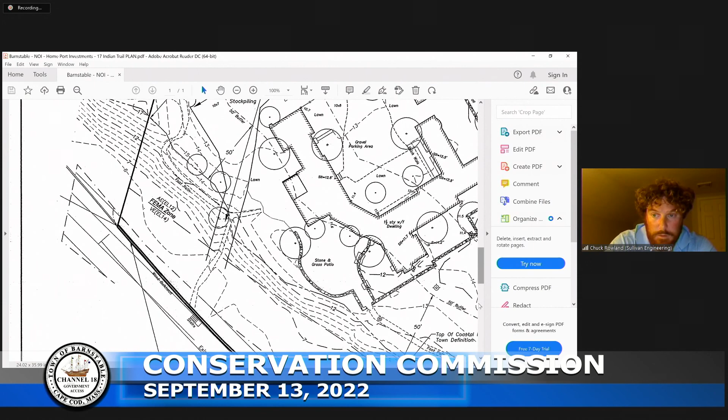Come on, quick, it's coming. I got to go slow, huh? Yep.

I think you get the idea here. We have the existing timber wall being replaced with vinyl, and we're putting in a tieback wale in the same location. With that, I'm happy to take any questions.

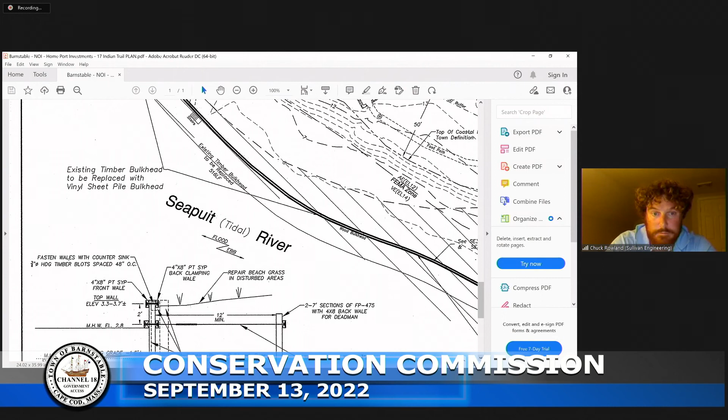We received the DMF comment letter, which had two considerations. First, appropriate erosion control measures should be employed to minimize runoff from the property into the resource area during construction. Second, after construction and prior to vegetation planting, DMF recommends nourishing the area behind the bulkhead to fill in eroded and displaced sediment. Fill should be consistent with the DMF and Massachusetts DEP's beach nourishment guide, and fill material should be of appropriate slope to avoid premature loss.

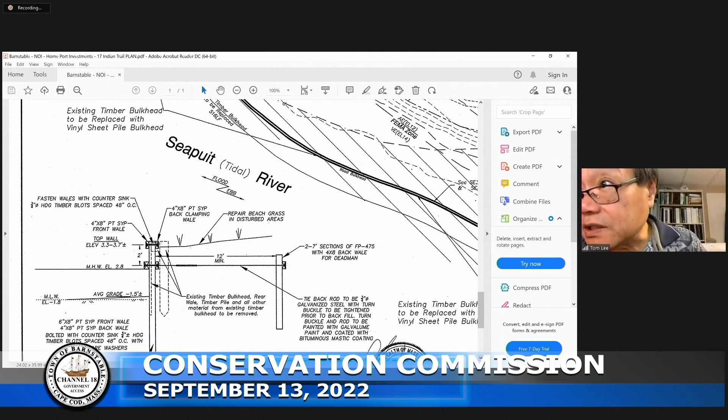Question from the commissioner. Let's see who has his hand up. Larry. Thank you. Hi, Chuck.

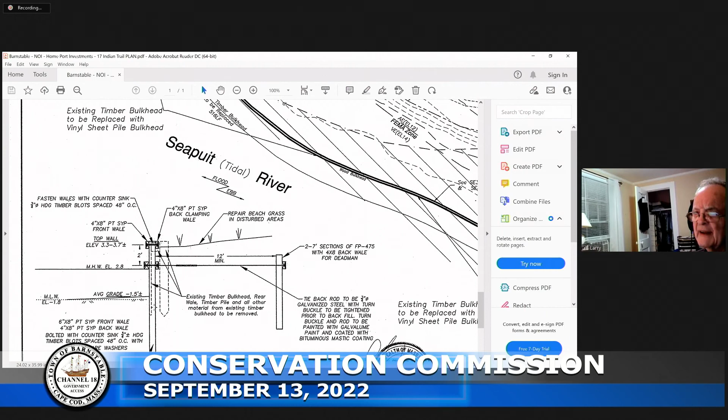I'm looking at what's on the screen, and it shows a drawing showing it looks like the sheathing is on the left-hand side, but what I'm interested in is how deep does this bulkhead go in its present condition? I presume it's wood all the way down, and how deep is the new sheathing going to go? I presume it's going to be pounded in by some sort of machine. Could you clarify those two things so we know the potential area that's going to be affected by this process?

Sure. So what you see there today is going to be the same height. We're not asking to change the height at all post-construction. The grade fluctuates, but it's about negative 1.5, and then we go to the top of the wall, so we're going to follow the grade a little bit. I gave the contractor a chance to adjust how he moves along, so 3.3 to 3.7 — it's a small variable.

So let's say a 5-foot face wall, and for construction stability and long-term rigidity of the wall, we've asked for 14-foot long sections, so they're going to penetrate the ground pretty far. But 2 down and 1 up is kind of the standard textbook ratio for things like that.

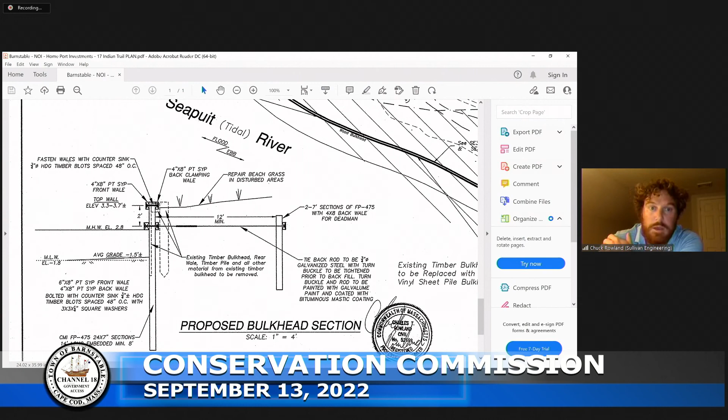So the way I pictured it was some minor digging right here so that it didn't slosh in. Dig out a handful of sections, install a handful of sections, and then move on to the next. When you're far enough away and the ground is stable enough, you backfill behind the wall — that's kind of how I've proposed it.

Okay, well, that makes sense. I'm sure some of the other commissioners, especially George, may have some questions, but I thank you for that information.

John? I wish we had a dock guy on the commission with us.

George, looking at this, can they just remove the wood, which looks like about 4 feet into the ground, and use that same hole to bury the new wall 8 feet down? Is that standard construction, George? Yes, this is very standard construction.

What happens is they'll go in and excavate behind the existing wall so that when they pull the existing wall out, none of that fill falls into the water column. They'll pull it out in sections, probably 16 to 20 feet at a time, pull the existing wood out, drive the new vinyl in place, put the dead men in place, put the tie back in place, and backfill that section before moving to the next. It's a really standard construction protocol.

They've got it down to a science now. So I'm glad Gilmore's on the commission. Thanks, George, that's all I wanted to say. It's just a really standard procedure. I don't think it's anything we have to be worried about.

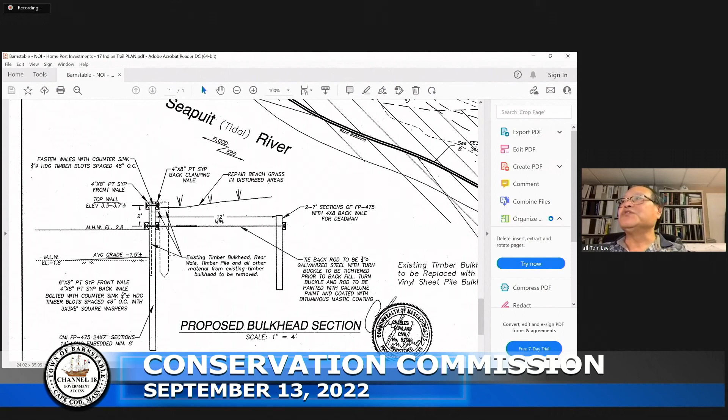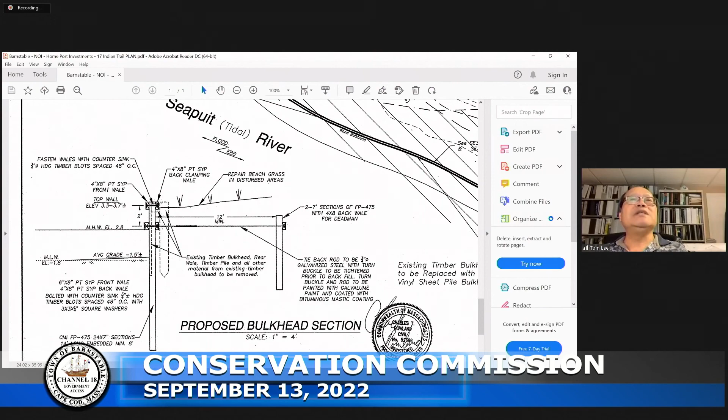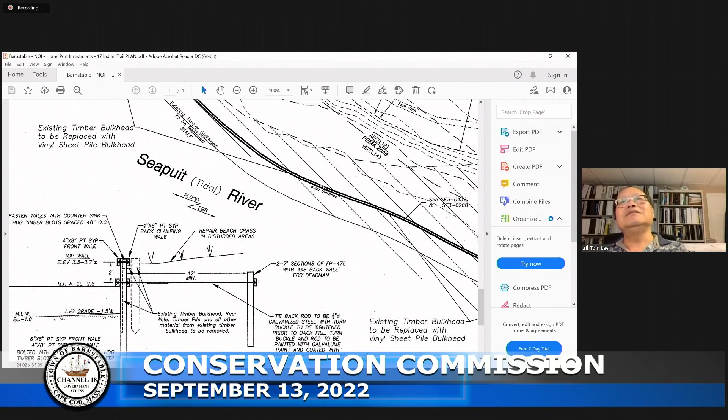It's nice to have George provide insight on the construction sequence, but I think we would require a written construction protocol from the contractor to be submitted 4 weeks before the pre-construction conference. One thing I'm wondering is whether we need to ask Chuck to show the limit of work on the drawing, because the wall is about 12 feet, so the limit of work behind the existing bulkhead could be 20 feet or so. We should also show the limit of the vegetation for the beach grass on the engineering plan rather than just the detail.

Can that be done through the work protocol, Tom, or does that work? Isn't that a little overkill? We've never required it.

I was the one- excuse me, I'm sorry. For me, I always seem to remember that on the wooden bulkheads, we always did show the planting of the beach grass, the width of it, on the main part of the engineering plan. I always thought we did. It just says repair beach grass in disturbed areas, so I thought that might cover it, but whatever you want.

You get them to take pictures before and after. Okay, yeah.

Any public comment on this? Hearing none.

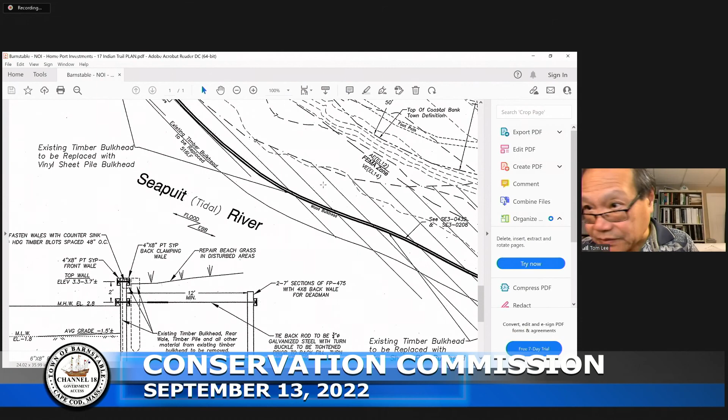Good luck, Chuck. Thank you. Have a good night. Yep.

The second NOI is Helen Hughes, to construct and maintain fixed piers, ramps, and floats at 94 Long Beach Road, Centerville, as shown on Assessors Map 206, parcel 007.

Good evening, Commissioners, Dan Ojala. I'm a civil engineer and land surveyor with Down Cape Engineering in Yarmouthport, helping the Hughes out with a modest expansion of an existing pier here on kind of a dead end of the Centerville River.

I'll share my screen so we can look at the project. Here we have the locus map on the site plan. You can see this is on the very east end, kind of near the beach club, pretty close to Craigville Beach.

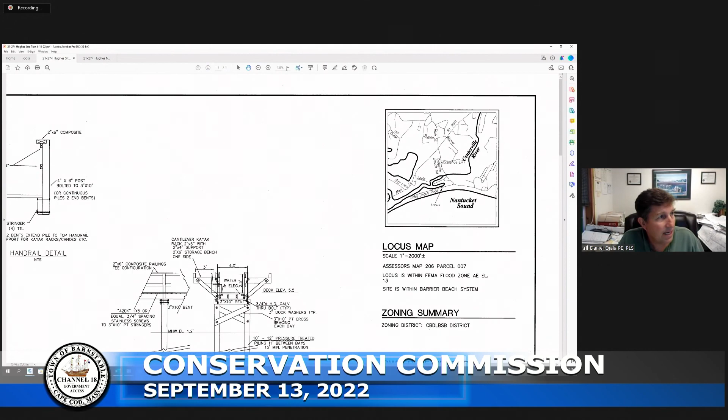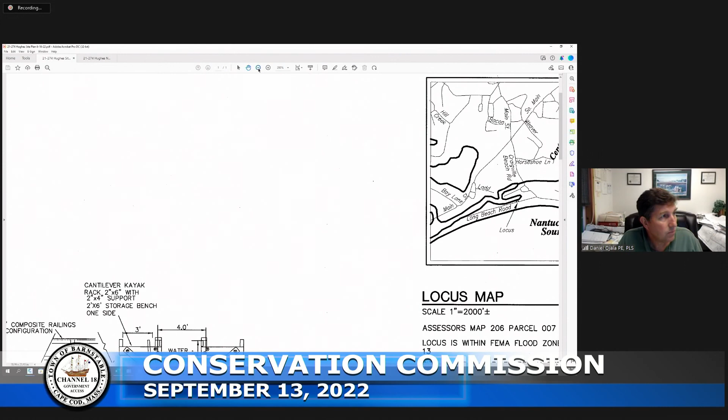It's one of the first houses on the right, which means instead of being in one of the busier parts with active boat traffic, it's at the very dead end of this little peninsula off the main river, where the flow really goes north under Craigville Beach Road and inland. This is just kind of a backwater, but it has been dredged, and it's certainly important for the members of the community up here.

I would share perhaps this view here, just to give you a good overview of the area.

This is the lot here, I believe from a 2019 aerial photograph. This is the boat here, a 25-foot regulator with twin 250s, pretty shallow draft, but they would just like to poke it out a little bit further, because at low tide right now there's really not enough water. You can see that by the profile.

Waterways hasn't had a chance to comment, so I suspect with your acquiescence we'd continue until after they meet, I think on the 27th. They had a comment that they'd like the full commission or board to look at it, since it is a bit of an extension into the channel. There are floats out here with boats on them that they move around occasionally, but it looked to us like there's pretty good room. Again, it's just the boat owners at the end of this channel that would be most impacted, as the main boat traffic is west and north of us.

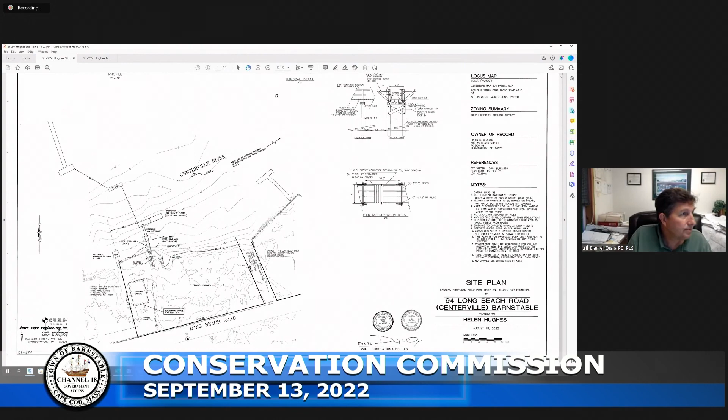There are a number of regulations which we involve ourselves with, but before I get into them, just to orient on the site, let me see.

There's an existing old 1950s licensed bulkhead here with a pier, ramp, and float currently licensed out to about here, and you can see there's hardly any water at mean low water. So we're jumping it out a little bit, about 20 feet, so we can get about 2 feet underneath the props even at low water, which we think is more reasonable. It's not a good shellfish habitat, but still, the muck could hurt things further up and down the river.

On the plan view, this is a vacant lot. The Cruteau property that we permitted recently is here. There's a little thin strip, and then this big vacant site with a garage on it. Here's the existing license number 6497 for the pier, ramp, and float, and there was an older license, 1590, for the older structure, which went back to the 30s or 40s.

There's a float pretty close to us on the west, but you can see here there's sort of a built-out bulkhead. So this is the best spot to have the pier on the site. If we were to go over here, it's lower and would have to disturb more salt marsh and need a longer structure to reach that channel.

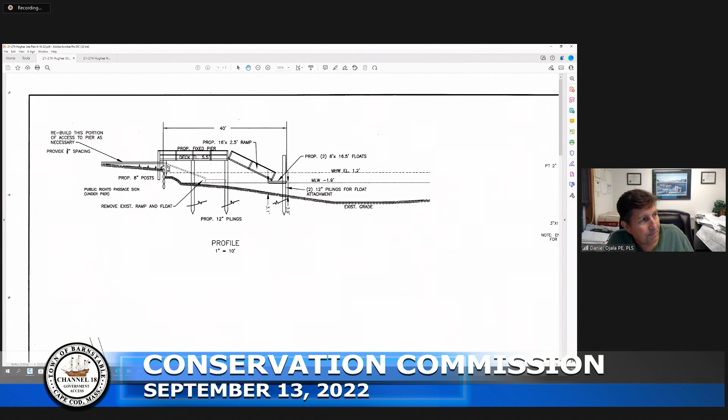The existing wood walk that crosses what we'd call a high marsh is right now fairly low to the ground and doesn't have the 3/4 inch spacing. We'd widen that up, raise it a bit, and go to the full 3/4 inch spacing. Then we're raising it up to a full 5 feet above the marsh at the toe of the wall, so we can have passage without needing a stairway up and down. I don't think there's much foot traffic, but the rules are the rules, so we're happy to provide that.

So, pretty minimal disturbance. BSC did a shellfish report. It's muck, just a couple of mussels that you'd expect in the upper marsh, but zero down there. They did find some crabs and so forth, and I believe the shellfish officer texted over late today that they didn't really have any issues or comments.

We should probably address the fact that, regarding waterways and navigability, from our floats it's only about 350 feet to a dead end. So no one's going to come through—it's a no speed zone, and no one's going to be racing through here. There's typically not any sailboats either; it's just a little too narrow up in here, and a dead end.

We'll still have 51 feet clear without the hull there between that float. As you can see from the photograph, sometimes they tie the boat on the other side. These floats are licensed and do move around a little bit. We put some information at the end, but the important thing is that...

We feel it's at least 35 feet clear, which is wide enough to get quite a vessel through here. There is a depth channel—we go up and down here occasionally just to sightsee—and there's good water even at low tide, so we'll make sure there's plenty of distance there. At 35 feet in this little backwater, we feel that's very safe and would not be a hazard.

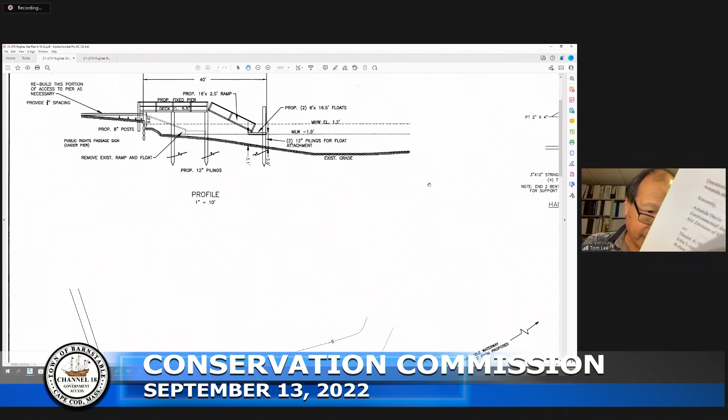This study collectively indicates that the height to width ratio of 1.5 to 1 between the base of the horizontal stringer and the salt marsh reduced shading and marsh loss relative to the typical required 1-to-1 ratio. DMF recommends establishing a minimum of 1.5 to 1 ratio across the full extent of the marsh to reduce the shading impact.

Second, any activity requiring a barge should be coordinated to avoid barge grounding or operation in intertidal habitat or shallow water, less than 2 feet between the bottom skirt and the substrate over the mapped shellfish habitat.

Third, the construction activity, including staging of the construction material and equipment, as well as the equipment transits to and from the construction site, should avoid the intertidal habitat to the greatest extent practicable. As much work as possible should be conducted from the upland portion of the project site to minimize impacts and avoid compaction of sediment in mapped shellfish habitat.

Any work in the intertidal zone should be limited to low tide, such that work is conducted in the dry.

Question from Commissioner George: the boat that's at the existing float right now, is that the same boat proposed for the new construction? Yes, that's my understanding, a regulator, 25 or 26 foot. That regulator is not subject to our regulations because of the age of the permit. To me this seems like a win-win for us. We're pushing this out into good deep water, getting 2 feet of clearance under the prop, and limiting the number of boats at this float.

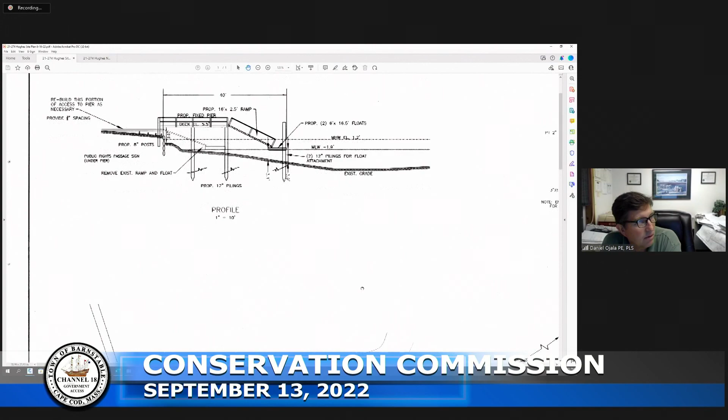Bill: Just to cover that, I've got 3.1 annotated here and 3.9 annotated there. If you'd like to add spot grades we could do that, but you see it's about a 2 foot on the mean low, so 5 to 6 would be beneath 1.9. Comes out with a 3.1 and a 3.9, about a foot difference from one side of the float to the other.

Usually we require some water depth surrounding the float, so we know exactly what it is, because right now when I look at that, I have to try to interpret the data from the contour and come up with something in terms of the water depths.

If you had some spots, Dan, that would be helpful. Yeah, we'd be glad to add a couple there.

Bill? What's the length of the existing pier? So the end of the float, it looks like around 20 feet. I could investigate that a little more carefully. The license from the face of the bulkhead has 19 is licensed.

And that's about a doubling. You're roughly doubling the size of this length, right? Yeah, it's what's permitted now. You can't really see that, but it just goes out from the top of the bulkhead and spans out with a long plank to a float. We're gonna extend that out over the water, and the length overall from the end of the float to the end of the float is going out 20 feet.

So roughly doubled seaward of mean high water. Yeah, I'd agree with that.

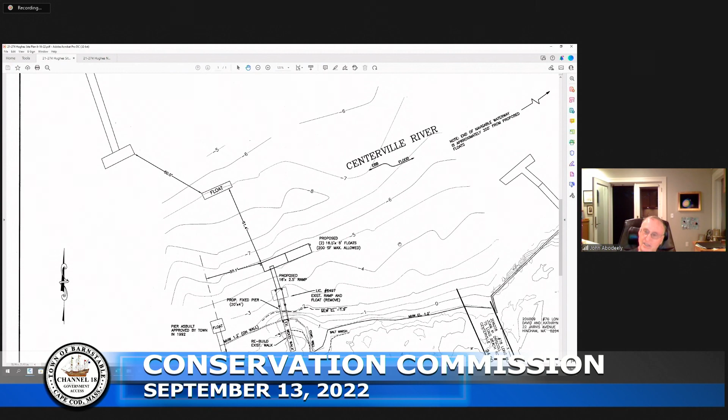But on the other hand, Pete, this one is kind of a grandfathered situation. So if it was a new request, that would be a real concern for me. But I'm really glad you brought the issue up, Pete.

Thanks, John. George? Yeah, I agree, Pete, with your comments. But again, this is an existing pier, so I don't think that plays into it.

I just look at it and I say, man, do we want a 26-foot regulator tied up to that existing float with two big outboards, in 1.5 feet of water at low tide? Doesn't make any sense to me.

Right, so I look at it as a big plus. There are 6 boats above this dock in the river. They're all outboards. And I disagree, John. There's no sailing up here because nobody wants to sail up at the end of this river. You get very little wind because you're up at this headland.

Yes, but I have seen up there, George, those little day sailers. Yeah, you might see something like that. Sailboards, whatever they call them. Yeah, but literally anybody that sails up there is crazy.

Anyhow, like I said, six boats up there beyond this. Let's see what Waterway says. I used to take my 30 by 60 foot barge up there, and last time I was up there, I was almost right near where this site is. I had a bottlenose dolphin swimming around me for about a week. It was pretty amazing, but I was afraid it got caught up there, though it did find its way out. I look at it as a real positive. I don't know why we're even getting all upset about it, but anyway, I'd say it's a big plus.

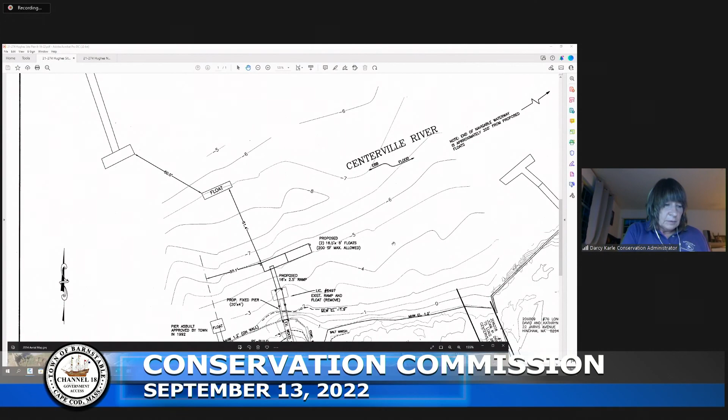And I noticed on number 6, you mentioned, Dan, about lighting, that would have to come back. I'm not sure I like the number 6 notation where it says lights will match what the regulations are. We always say that needs to come back as a revised plan. I don't see that you are showing the lights and all the information about what the regulation is. Are there lights on the plan?

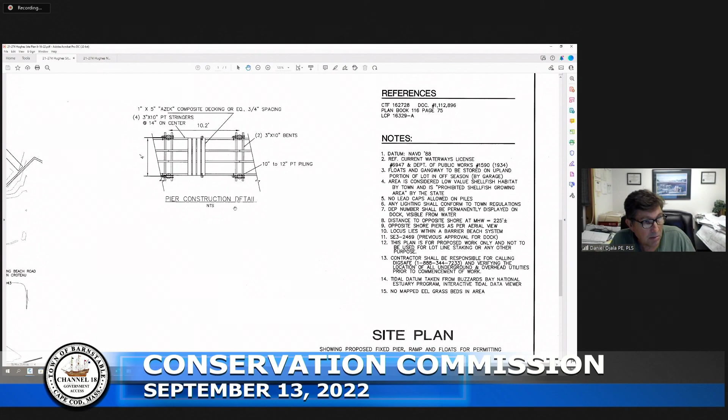We asked the owner whether he would like some lights, and he said that he would. So we noted that it would be the minimum wattage and spacing. There's water and electricity shown on the cross section. I don't know that I detailed exactly where, but we could certainly put a couple of lights on the plan to show that they meet code.

So the commissioners, you should add that to the motion if you're going to approve lights, but then that has to be on the revised plan showing where they are. You do prefer to have that, and they'll be switched off from the house, the whole spiel, but that has to be on the plan. Since there's no house to switch it off. I'm sorry, yeah, there's a garage.

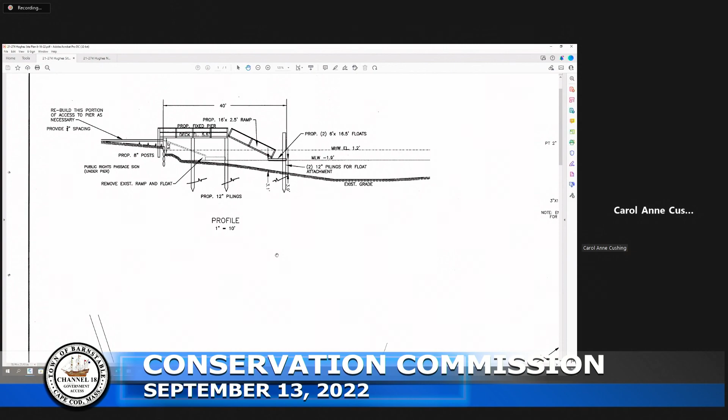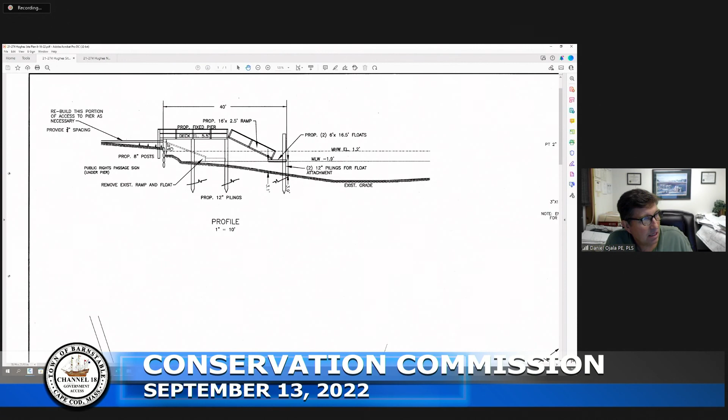Thank you. Sure. I'm not sure that I'm entirely understanding you, but the rock wall, which is like the substrate in the high marsh, is not going to move. What we would do is raise the decking up above that, just a little bit higher. You can see basically where the old one is to the new one's probably about 1.5 to 2 feet higher to get the proper 5 feet of clearance under it.

So with respect to yours, it's no closer. Here's the ghost of the old outline here and the new one here. So it just goes straight and then the floats go to the east, away from your property. This is the Cushing property here. So we're moving to, we're going to be 37 off of the extension of the lot line. So basically no closer, and it's moving east a little bit.

The regulations do suggest being closer to the center of the lot, so that's why we shifted it. That would be, I believe, a good answer for your question. But again, we're just raising the walkway up a little higher. The wall is staying where it is.

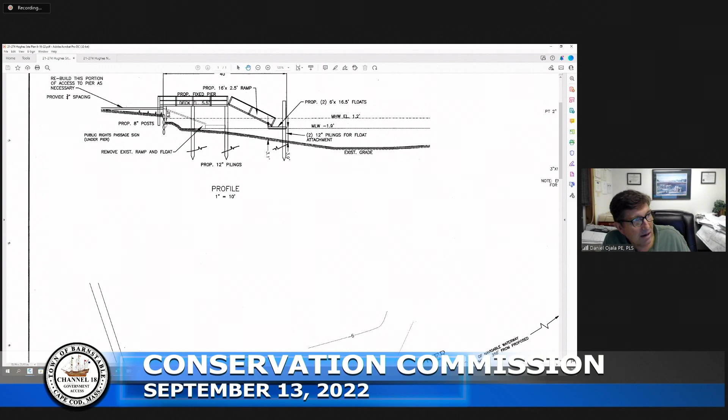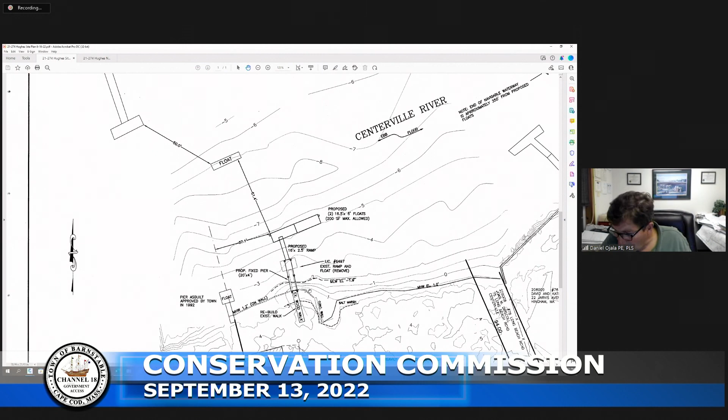So the project doesn't involve any repair to the wall? No. We'd have to come back if there is any failure of that rock wall. It is a licensed structure. The license number I quoted earlier is 1590, and they would have to come back for that under a separate order. Thank you. Thank you.

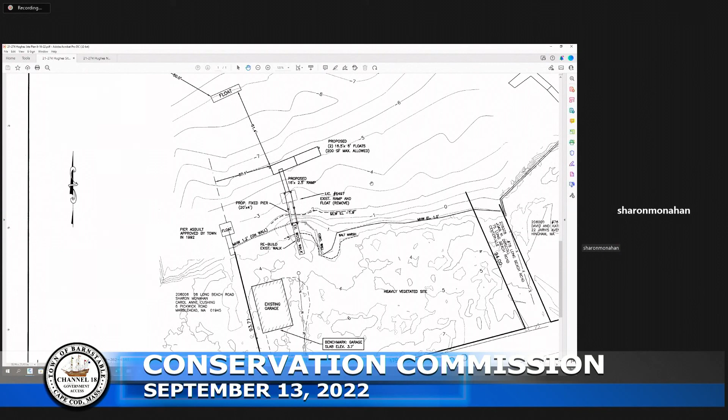Thank you. Then the waterways is meeting on the 27th, so the next available date would be October the 11th. Is that okay? Yeah, that should be okay. If we have trouble, we could just ask for another extension. So I'd appreciate if we get on that meeting.